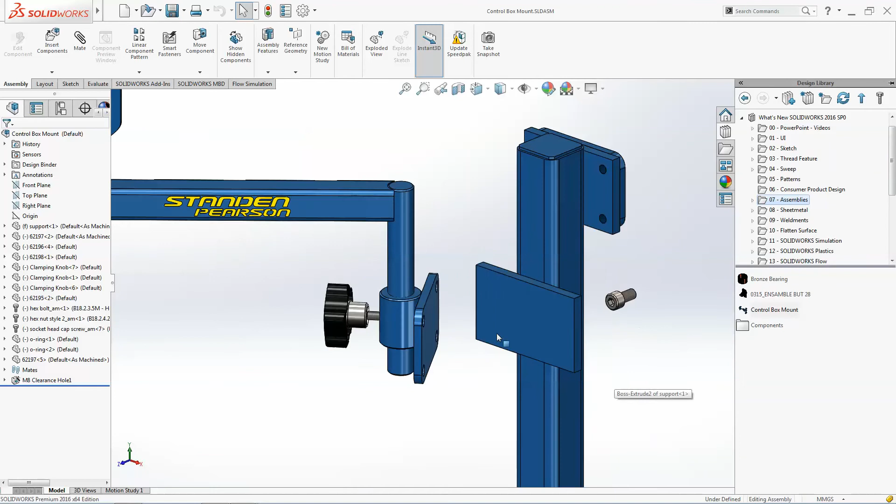In SolidWorks 2015, we introduced the Profile Center Mate. In SolidWorks 2016, the Profile Center Mate is now here on the pop-up tab, so I can quickly attach that right there. In addition, if I do it with two cylindrical faces, I can also quickly access the lock rotation option.

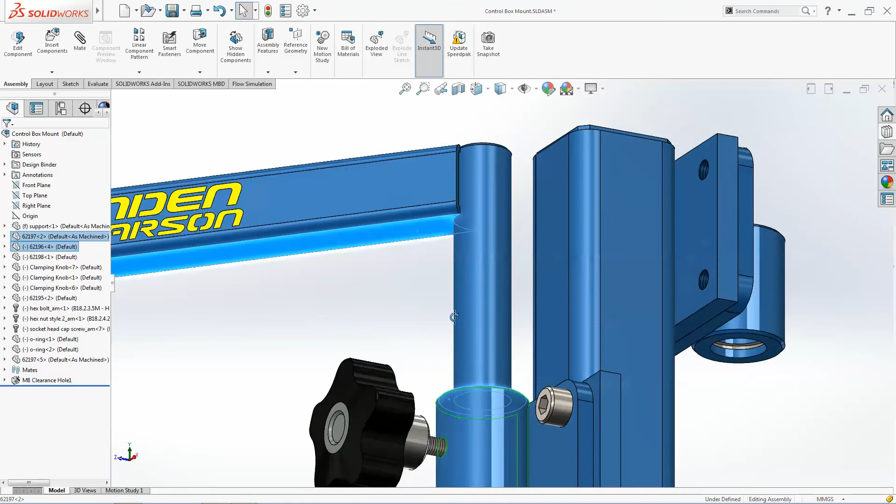Furthermore, on those quick mate tabs, it's always been the case that if I make 3 selections in SolidWorks and hit the mate key, I'd get a symmetric mate. That's now on the quick selection, as well as the width command.

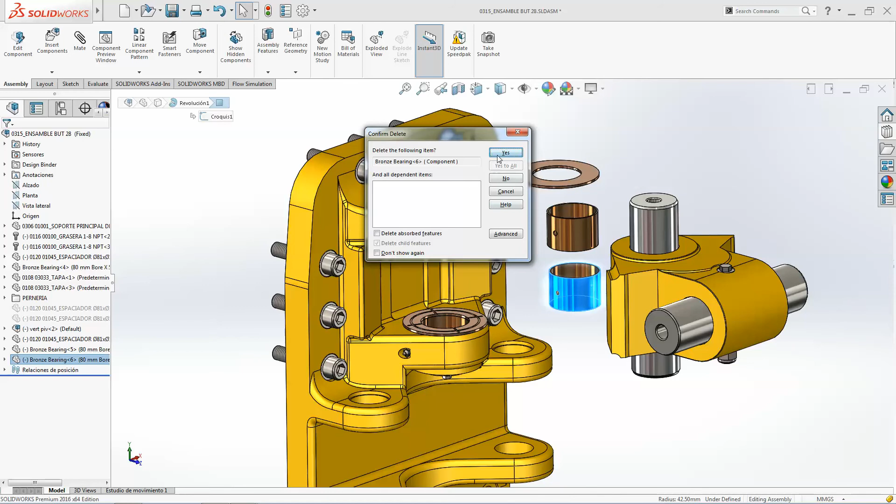One of the big new changes to SolidWorks 2016 as far as mating is concerned is the ability to mate things using transparency. So let's get rid of this extra piece here. Now in SolidWorks 2016, if I'm using the mate command, the first object I select becomes transparent so I can then select other objects.

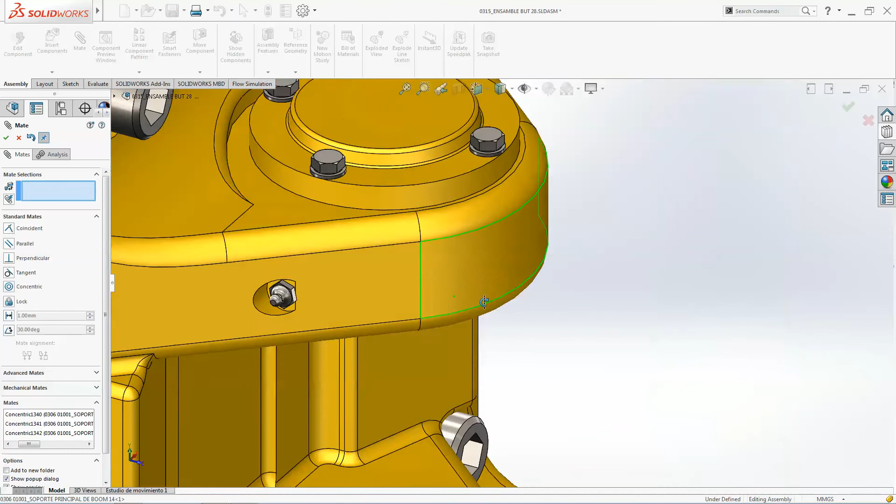It's not really necessary in this case, but if I were to select these pieces and make a concentric mate, that washer is now inside the part and would kind of be a pain - I'd have to make this transparent, go get it, all that kind of stuff. But now in the 2016 version, I can simply click on the face I want to use for the mate alignment and quickly apply that mate the way it was supposed to go.

Cool stuff. The other feature I wanted to show off, I think this is probably one of my favorite features from SolidWorks 2016, is what they call the mate controller.

This is an amazing piece of software where, when we're working with assemblies, as long as we're close to ground, it's relatively easy to manipulate them, but the farther away we get, it can be difficult to get it exactly where you're looking for. So in SolidWorks 2016, they gave us the ability to use the mate controller.

I collect all the mates I want to use, and then I can select each of their positions and create a series of operations for this robotic arm, in this example, to move over an object, close the jaws, lift it, and then go ahead and create new positions.

So I can have it turn and pivot over to where it's going to drop this item. Either by using the on-screen connection here, or by just manually entering a value, I can twist this until I get it right where I want it.

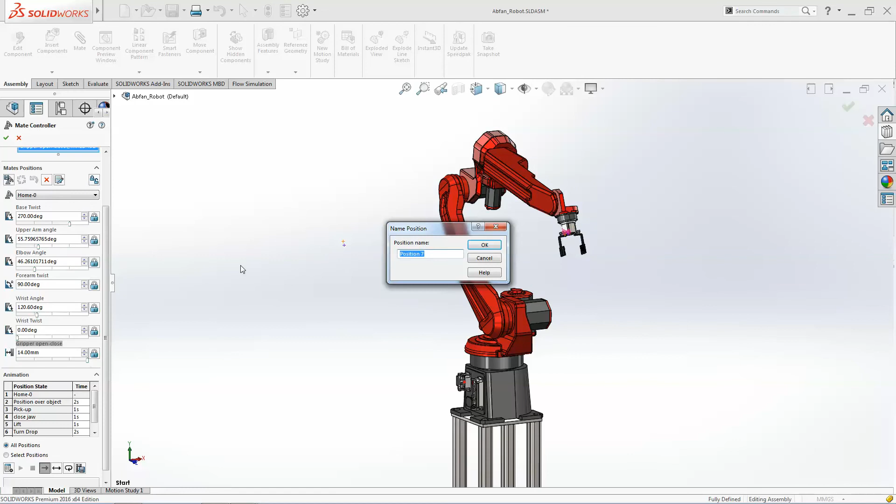And maybe we'll run the gripper back to open. We'll update the position to save it. And then, let's say I want to return it to the home position. I can just set it here, create a new position, and just like that, I've got a full range of motions for where this assembly is going to go.

Normally you would have to do this with a whole series of configurations, suppressing and unsuppressing mates. Well, in 2016, they make this a whole lot easier.

Now this is all well and cool, but here's where it really gets amazing. You can set times to move from each position to the next position - for example, 2 seconds to make that turn to drop.

And then you can animate the entire assembly sequence of this arm moving through all of its motions to deliver the part where it needs to go and then return to its home position.

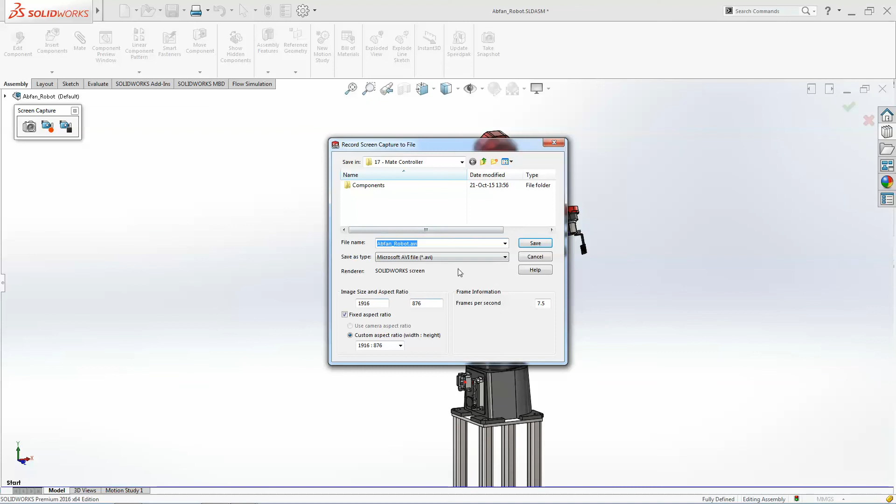That animation can then be saved into an AVI file or even dropped into a SolidWorks motion study to be used to analyze the stresses that machine is going to go through.

So you can use the mate controller to develop a series of motions for your assembly, and then actually use the motion study analysis in Premium to determine the forces you're going to see on this, then use your FEA to make your design better there.

So I think between those mate controllers and those quick mate commands, you're going to see a lot of advancement there in the assembly workflows. And like I said, this is just one of the many changes for 2016. We wanted to give you a little quick snippet preview.